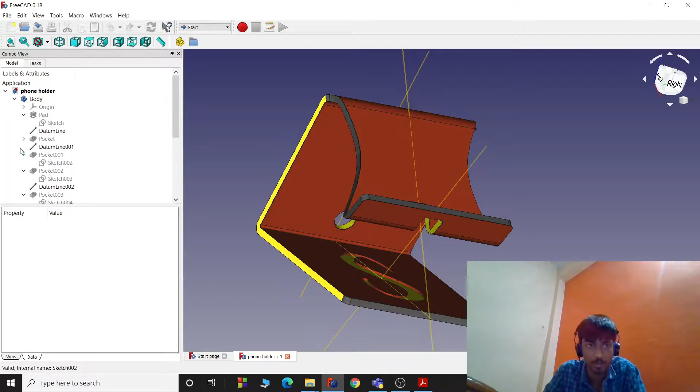For my DIY assignment 1 part 2, I have made a cell phone holder. As you can see, here is my cell phone holder. For making this, first I drew the front view of the cell phone holder. As you can see, it's completely green, which means it's a fully constrained sketch. I kept this angle 75 degrees so that it does not fall off due to the phone weight.

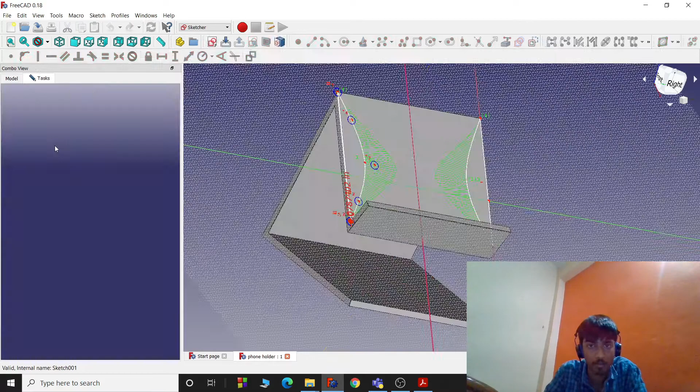Next, I drew one of the semicircular curve sketch, and using the symmetry feature I did the same on the other side. This is to cut these curve parts on the edge of the slant part for making it cost efficient so that less material is consumed.

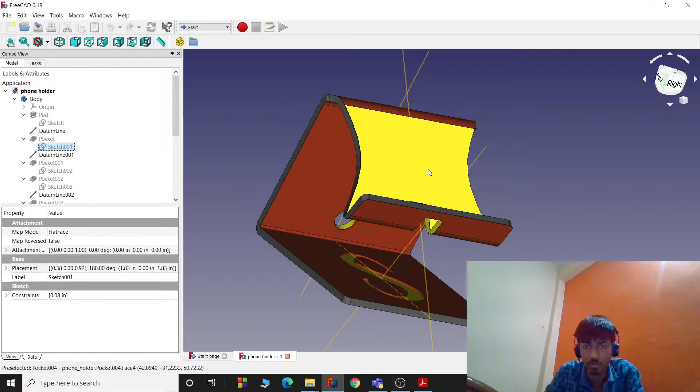Then I have created this sketch to make a hole on the other slant part so that the wire can pass through it. This hole and these cuboidal parts, I have sliced it from the main body with the help of the pocket feature.

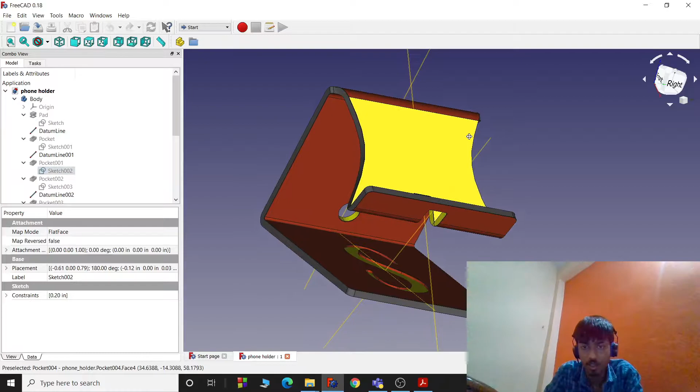Next, for writing this S on the base, I have used this shape string feature and then used the pocket feature to make a thin slice of S on the base. The font of the letter S I used is Bella Years.

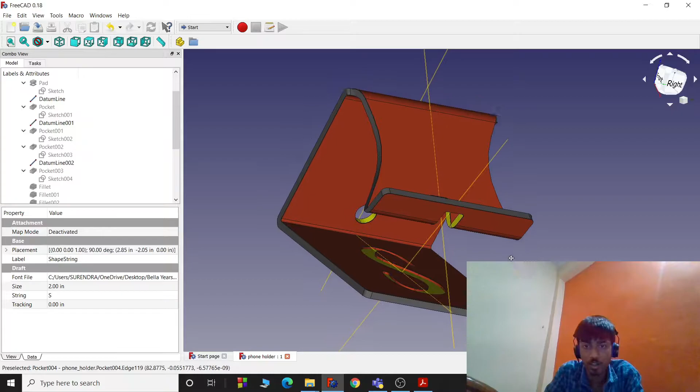Next, I used the fillet option on all the edges to make it a smooth solid. Then, to make it more attractive, I have added colors to various faces. Like, I have put the black color on the borders, red color on the main face, and the yellow color on the holes.

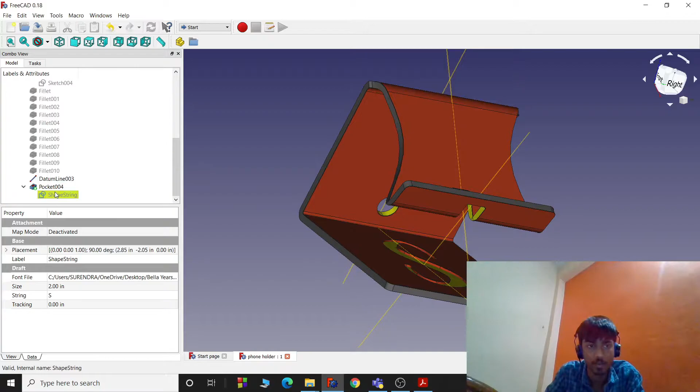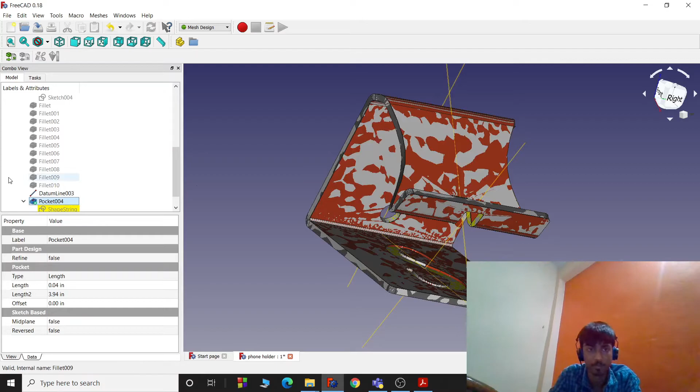Now, let's create a mesh out of it. Select this, go to mesh design, meshes, create mesh on the shape. Let us keep the fineness to be fine. Yeah, the mesh is created. Now let's export it.

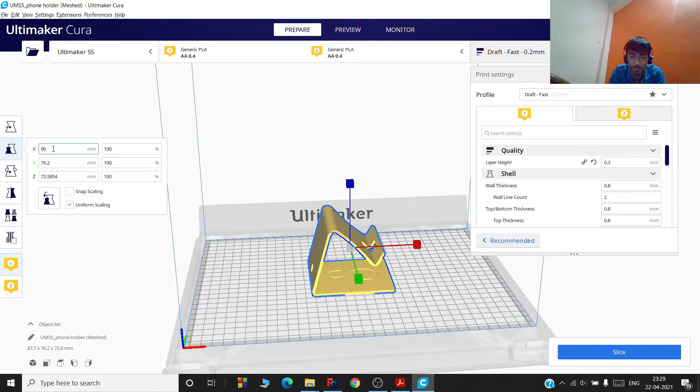Now let's go to Cura. This is Cura. First, let us change the dimensions. Select the object. Let us keep the x as 90. Now, as you can see, the dimensions of the phone holder are 90 cross 78.2 cross 74.5.

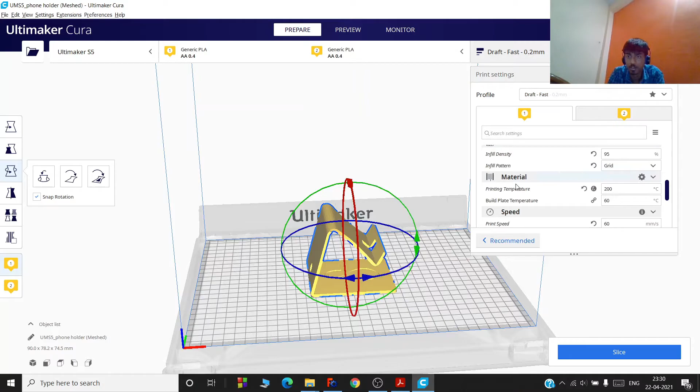Now select this phone holder and select the option lay flat so that it sticks to the build plate to give it support. Now let's go to print settings. I put the profile to be fast 0.2 mm, the layer height or thickness to be 0.2 mm, the infill density to be 95%, infill pattern grid, printing temperature 200 degrees Celsius.

The infill density I put 95% so that it should be at least strong to hold a phone. Print speed is 60 per second and the build plate adhesion type is brim. Now let us slice it.

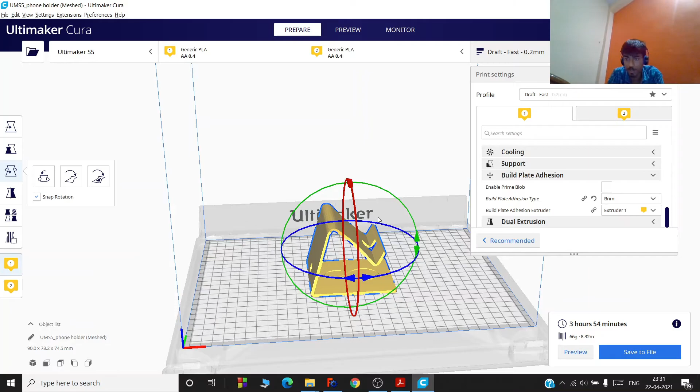Now we got the printing time to be 3 hours 54 minutes, which is less than 4 hours. The weight is 66 grams, which is so less that it can be taken wherever we want. Now let us preview it. Now by dragging the slider up, you can see the state of printing.